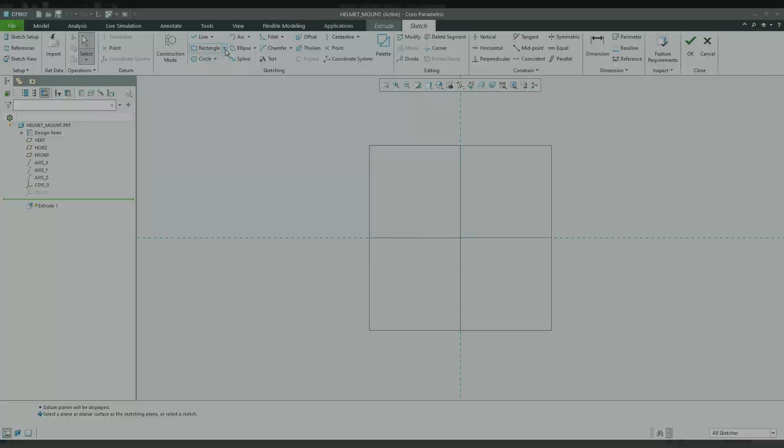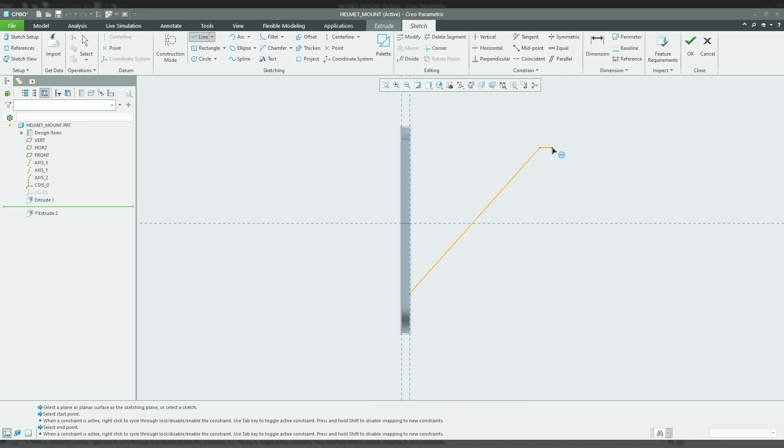Starting off in a CAD software, I'm just going to roughly explain what I'm doing as we go along. So starting off with a simple rectangle, adding some splines to make those nice curved lines, and then mirroring them across the middle. Extrude that out, and then working from the mid plane, start getting the arm in its rough shape.

As I was designing, I was trying to think of what printer orientation I wanted to make this in. I decided to lay it flat, so I kept that in mind as I was creating the design. I didn't want to have too many supports.

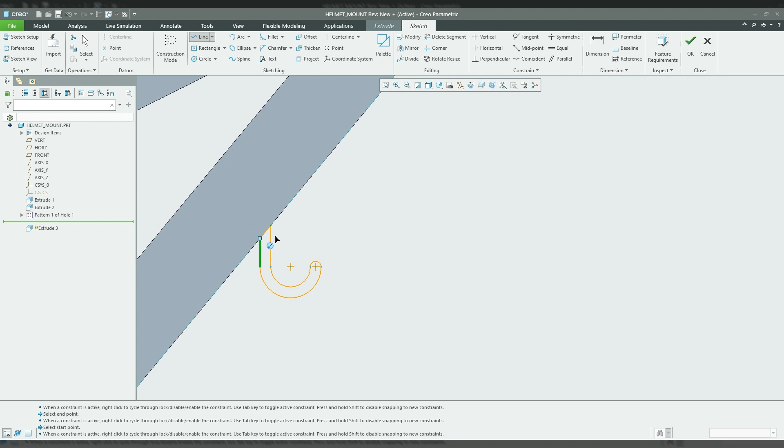So right here we're making a hook for a key, and again, extrude that over the mid plane. And then here is the final form. Added some rounded edges to make it look a little nicer.

For the 3D printer, we're using a Creality Ender 3 V2 with some black PLA. And I figured out how to make the nice time-lapse videos with a switch and a DSLR, which you'll see coming up.

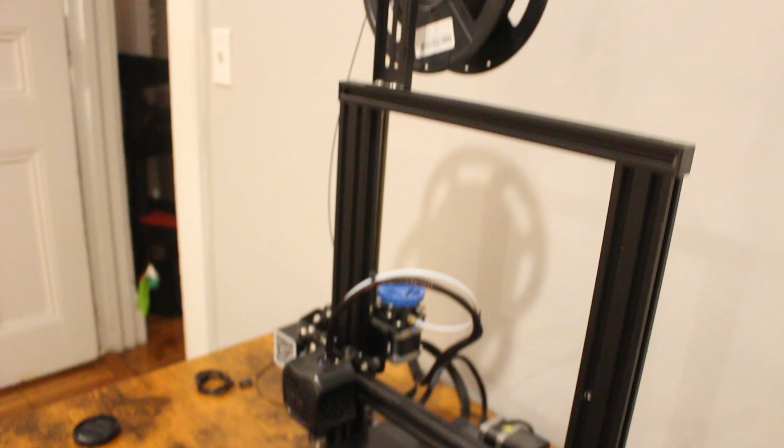I'm going to need some better lighting, but luckily I got some lights that came in today. And fresh off the printer, we're going to mount them on the wall.

I'm just using a screwdriver and some random screws that I had because I didn't have a drill at the time, and these aren't going to be supporting that much weight.

Now, one thing I didn't realize when I was making this is that the screw hole is directly in front of the arm, which is a bit of a workaround, as you can see here. But I wasn't going to redesign them and reprint them, so I just went for it.

And just tossing in the last screw. Now we're throwing the key on and putting the helmet on. And you can see they work as intended.

So I was pretty happy with the result. There's a few things I probably would have changed if I was going to refine the design, but they work good enough and I like them. It adds a cool addition to the space.

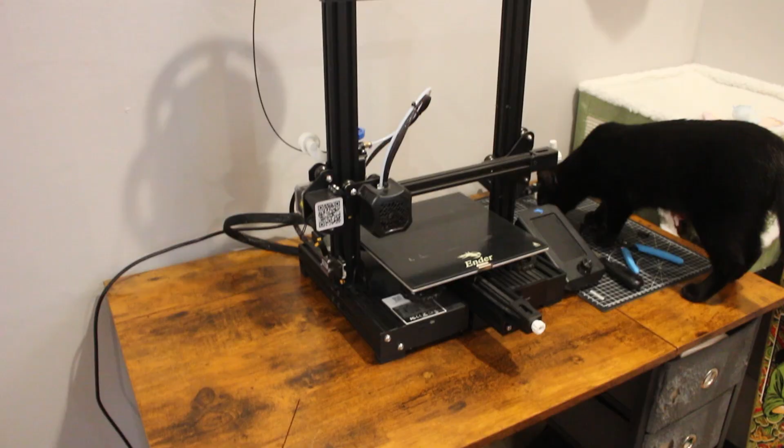And just a couple cinematic shots. Hope you guys enjoyed the video. I got a couple more projects coming out, so stay tuned for that.